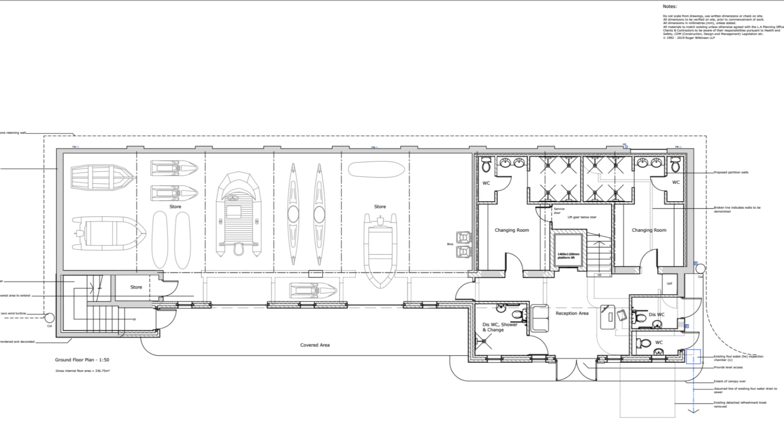It's got beach huts on top at the moment, which aren't going to be used for the coming season. In fact, we've got a guest at the back who used to have one - he hasn't got it anymore. So the ground floor is very much kit storage, garages, and a wash-down area.

Where are we now? This one, which is all this area here.

What's this there? Along this side you have his and hers changing rooms, which is something we haven't had for the last 50 odd years. It's just been everyone getting changed, which back then was okay, I guess, but times have changed a bit now, and safeguarding and such like anything else. So their change rooms have toilets within, wash facilities, showers, completely segregated.

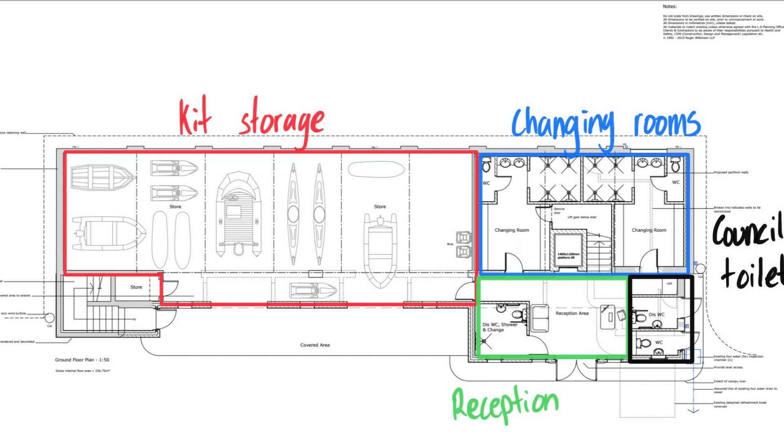Does the council maintain those toilets? Yes, they're nothing to do with us. All we've got is a wall that goes onto the back of them.

The cliffs are here, all zigzag steps, all steps going down this way, down the side. As you come round to this end, main entrance is in this end, into a reception area, management desk and such like, booking - I suppose like a small centre type.

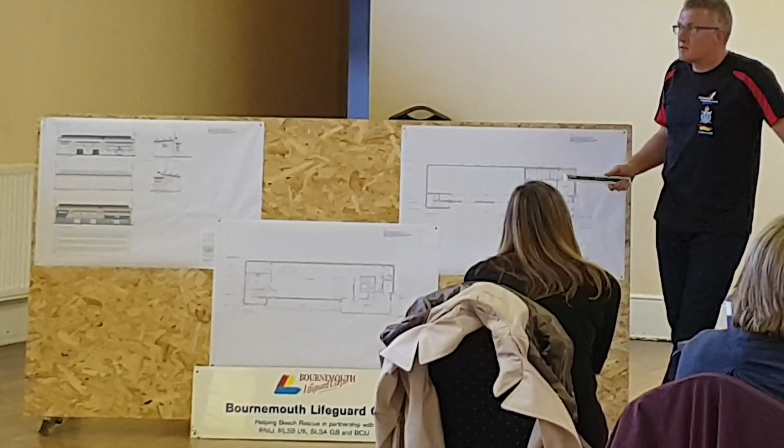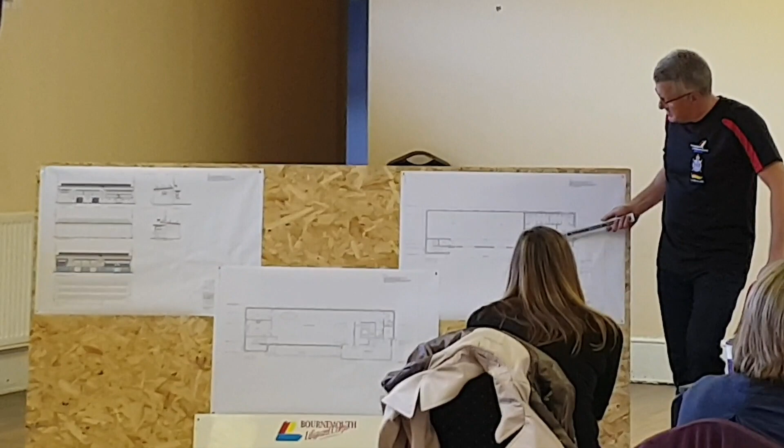Very, very small. They would come in here. Changing downstairs, all wet. Stairs upstairs - want to try and keep upstairs dry. The plan is you've got wet and you've got dry, so you don't go upstairs in your wet suit.

Come upstairs, we're now upstairs here. On the front left hand corner, so over the reception, we call it an operations room - or you could call it a lookout room, whatever you like. It's just where someone sits and views and runs events from. So it'll be completely glazed, full view of the bay pretty much from end to end. So that's at the front.

Come behind it, you've got some storerooms, toilets. From there to there is the training meeting room, so that's 15 metres by 8 roughly, training space.

Is it going to be sort of multifunctional, and you have the ability to divide it up if required, etc.? Yeah, you can put a screen across or whatever, so you can use half of it or the whole thing.

On the front of that, looking out over the bay, there's all your bifold doors and such like going right along the front. Again, they will be sorted for storm weather and everything else, so that can all open up and create space onto the balcony area just in front of that. So you'll have open space then, suited for summertime, when the sun shines.

On the end of that, kitchen, fully functioning, fully working kitchen, so you can do refreshments and catering to a level. Then you've got another storeroom at the back, but who knows what that will become. I'm guessing, from our point of view, it would be your dry side training aids, some mannequins and such like, along in here.

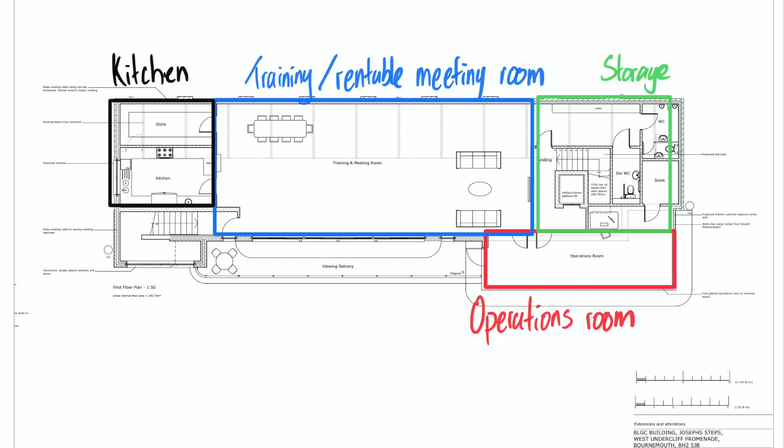Where's the slipway from there? Slipway - across the prom, straight down the steps. As you come off from the steps, you've got a shower unit just on the right hand side. So one little curve on the prom, showers, sort of to the left of that really.

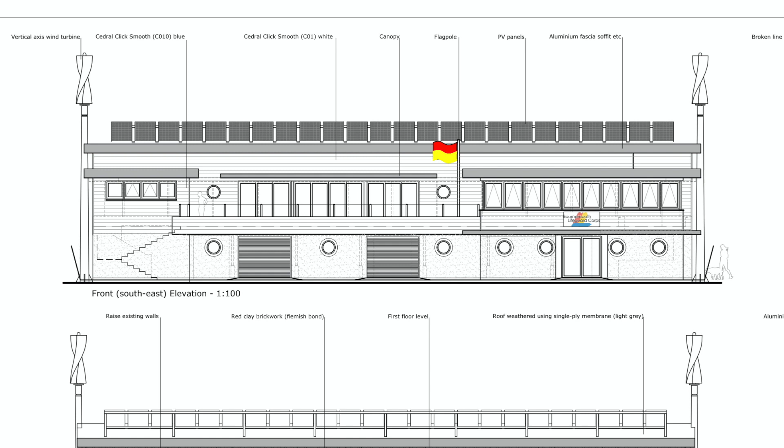It's essentially the same as Durley Road, isn't it, I think? Yeah, give or take, not a lot of difference with the peak, so it still works, fortunately.

We've got use of the space in front, but it's not our space. We thought we were going to get the space in front as it stands at the moment, for cleaning down boats and such like. They won't give us that - that's a public space. However, you just sort of take it over really.